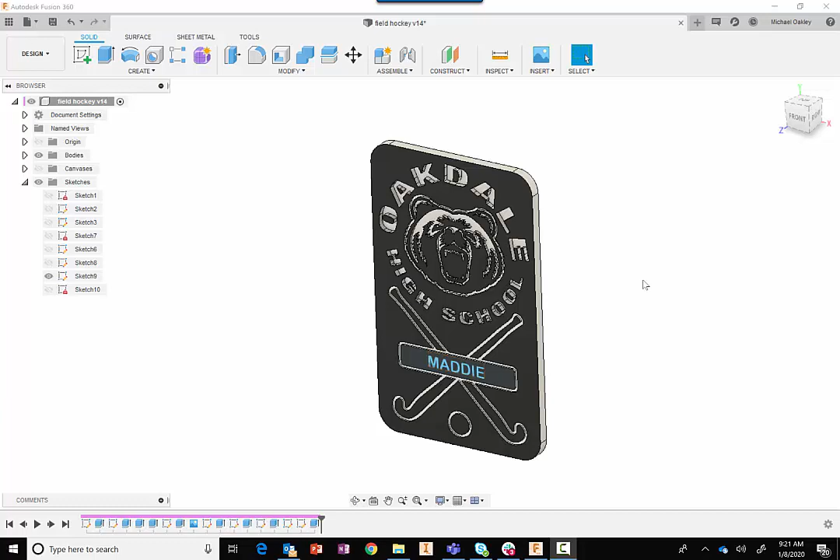Okay, so now let's take a look at the toolpaths we'll put on here for performing these V-carve functions. I'm going to switch to my manufacturing environment. Because I was messing around with the original design model, all these toolpaths are out of date, so I'm going to quickly generate them and have them recalculate the proper toolpath information.

A couple things I do here, especially with V-carving, because I see a lot of posts about, hey, my V-carve didn't go as deep as I wanted, or it went too deep. What I typically do is have a bunch of scrap around, and I'll program one of these letters and try to cut that on scrap just to test the depths I've defined, to make sure I don't invest my full sheet only to find out something is wrong. So utilize your scrap in meaningful ways so you can do test runs before you commit.

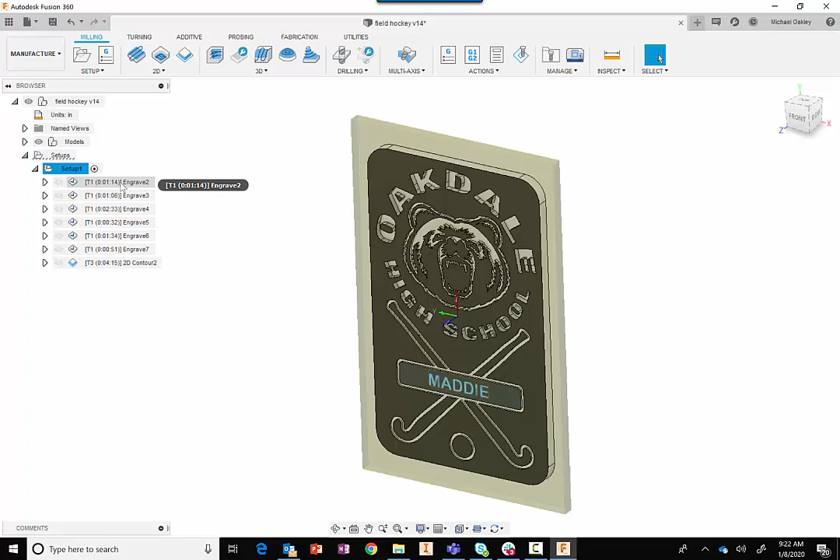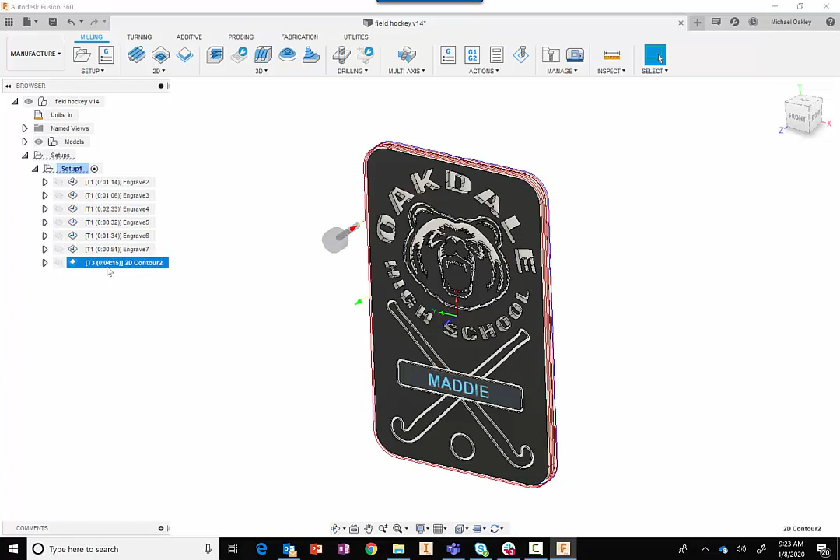Within Fusion, we can see all these different operations. I have an operation for cutting out the larger letters, the smaller letters, the face, some of the perimeters here, the actual field hockey logo, a circumference, and of course the final contour to cut that out.

Let's just examine these toolpaths and see what we have. I've been cutting these out of PVC, so what I've done is purchase white PVC, paint the surface black, and then perform my carving operation after that.

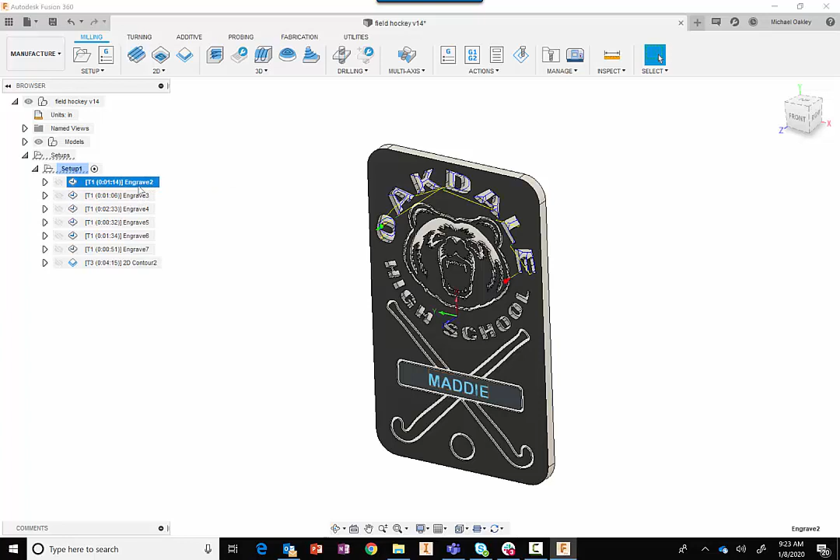Let's look at this very first one. The tool I've selected for this is a 1/2 inch 90-degree chamfer mill that I've defined inside of Fusion, and I use this tool for all the operations you see here except for the contour at the very end.

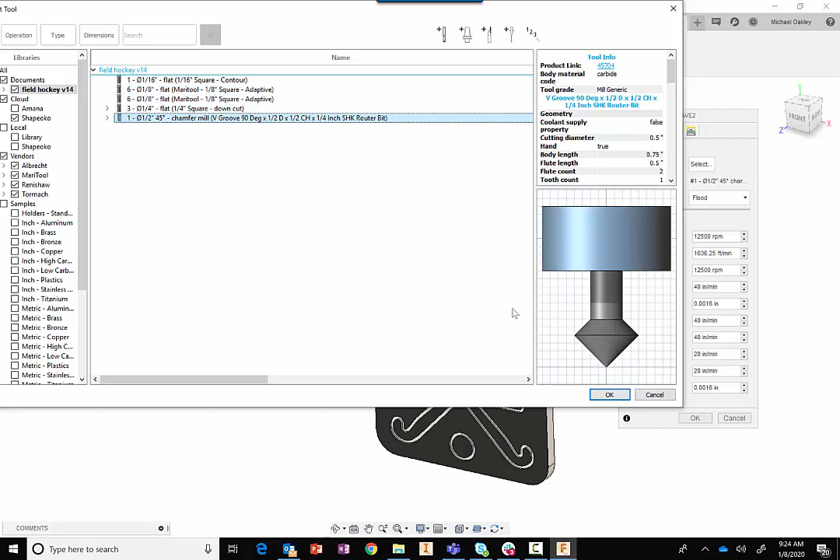Here are my spindle feeds, so my RPMs are pretty low. Cutting feed rate I set to be pretty slow, it can probably be a lot faster than that. What I saw was when I set it faster, I was getting some black rubbing occurring, so I'd run a second pass to clean that up a bit. But you can play with your feed rates. This entire model to cut from start to finish is only about 30 minutes, if that.

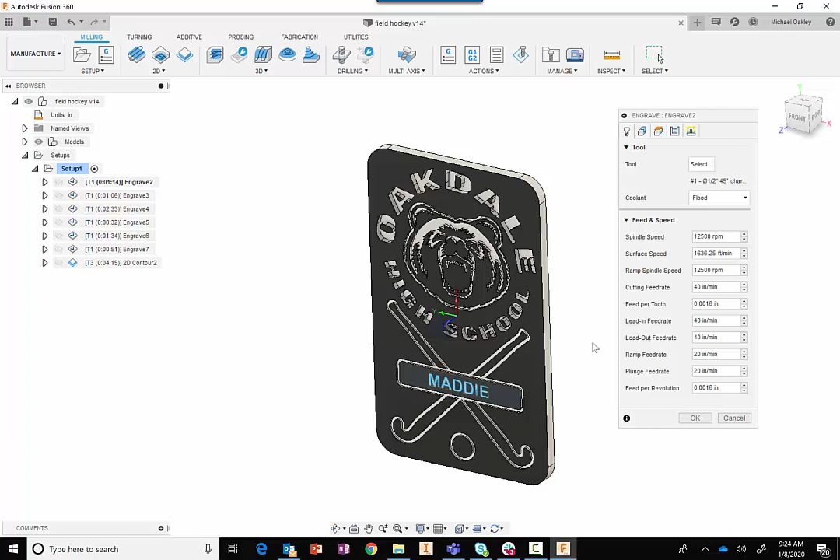Now here's the important part. Here's where I've selected the chains of what I want to cut, and I've selected the top surface of these features. Fusion automatically calculates the height that we have here. I went through each one of these and saw what it was going to do, you can see that's kind of an odd number that's put in there, so that's not something I put in to determine the height, Fusion automatically calculated that.

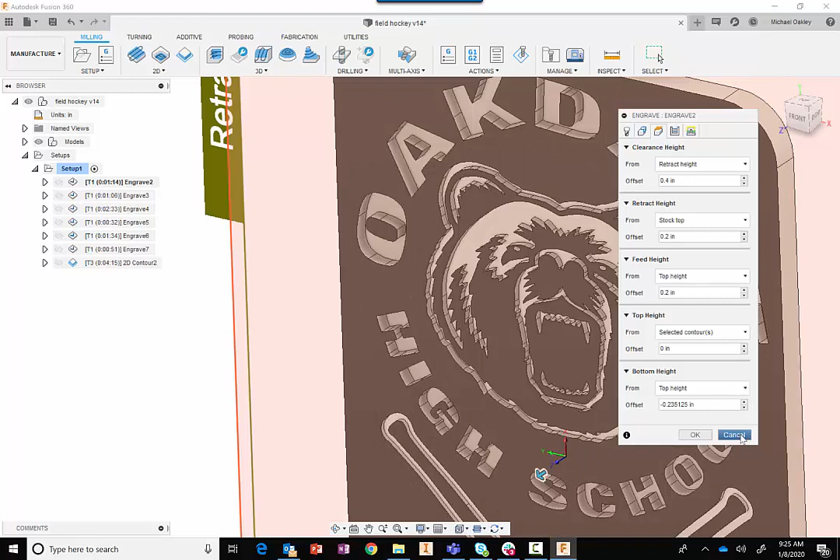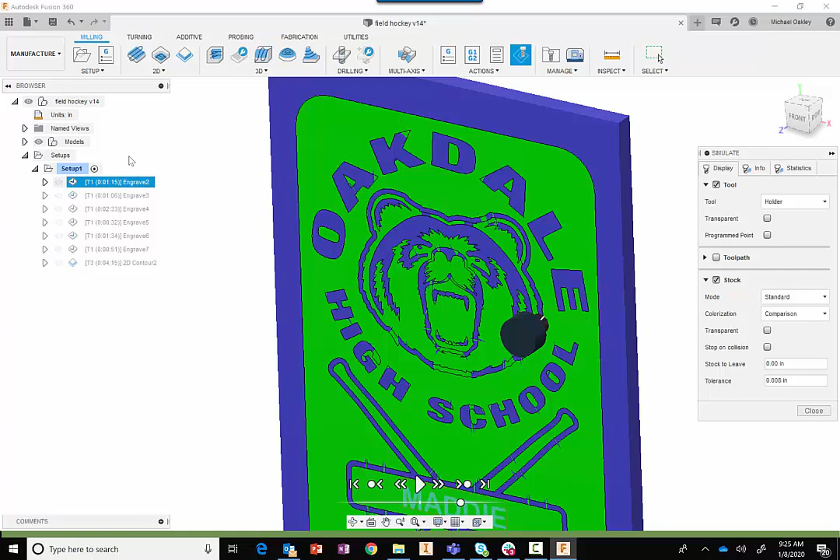Let's take a look and see what that might look like in a finished simulation. We'll generate that because we messed with the tool, and I'm just going to simulate that one toolpath. One of the things I like to do is turn the model off, especially with V-carve. Then I'll change this colorization to material, I'll make it this plastic vinyl, and go ahead and simulate that, and we'll see how it's going to look.

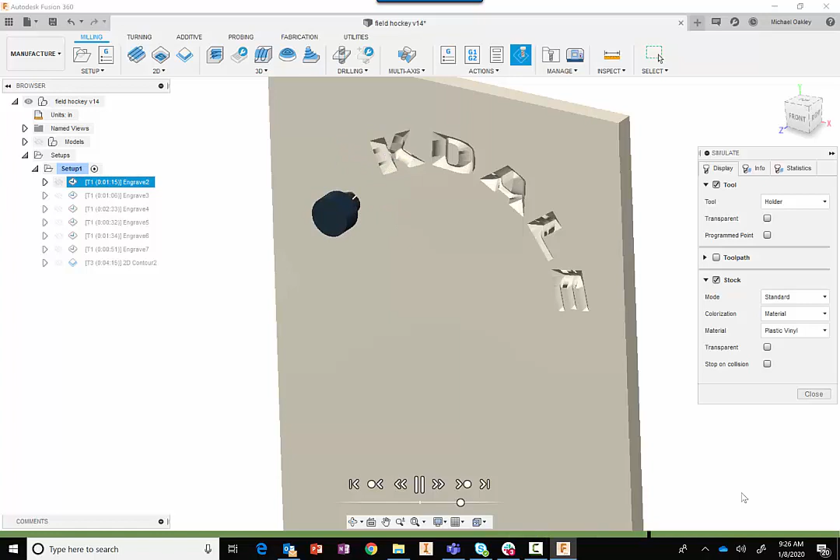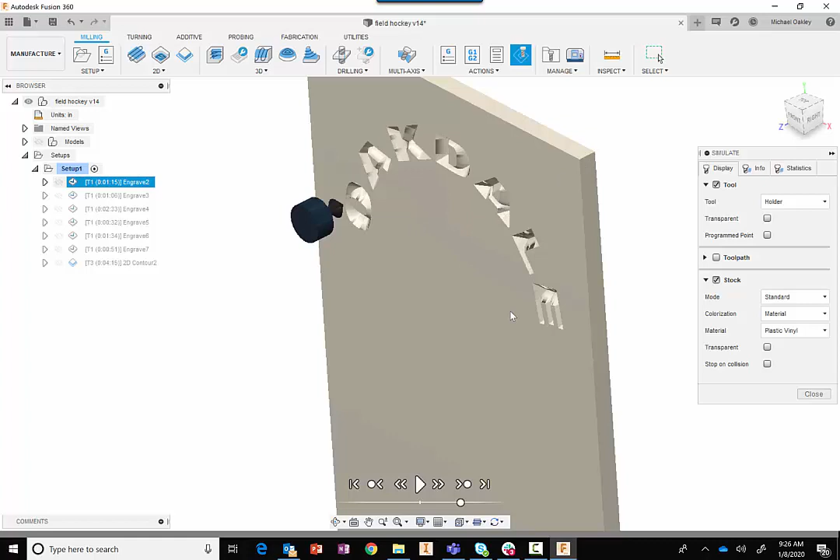That actually looks pretty good to me. I ran a test run of that, and I didn't end up losing all this detail in here, in terms of what Fusion's showing me versus what it actually outputs is pretty darn close. Of course, setting your proper Z height to the top of this board is what I use in this case. In the case of V-carve, I never set my height to the bottom, because there's varying thicknesses in the stock, and I think setting it to the top is where I've had my success.

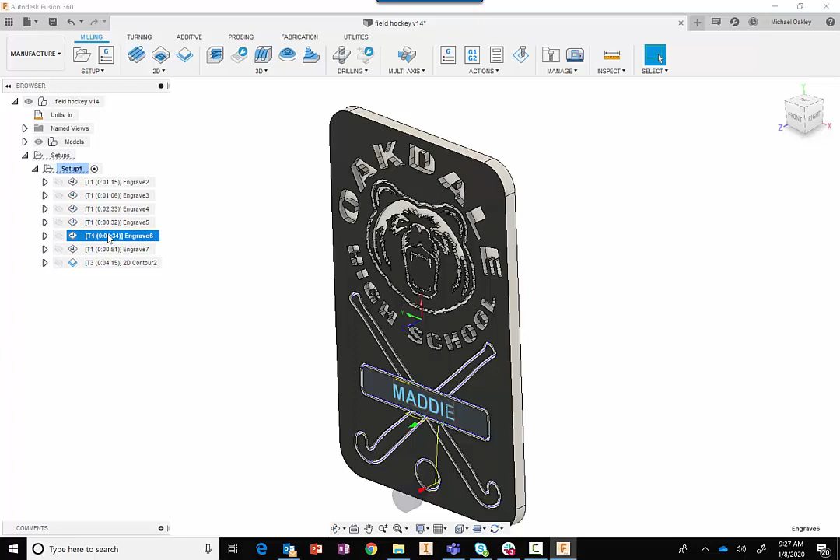Let's take a look at another toolpath as we go through here. As I mentioned, we used the same tool. This circumference, I could have easily used a small end mill to go in there, but I was able to achieve what I wanted with the V-carve 90-degree tool.

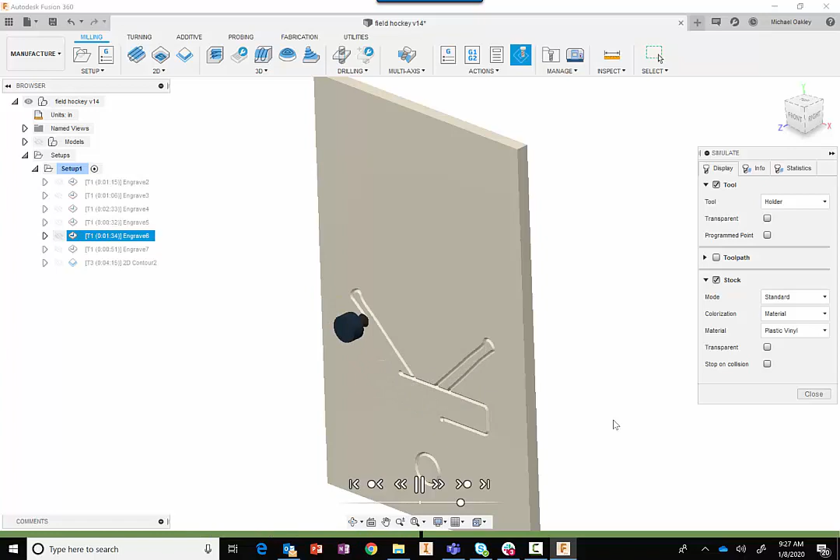And so now if we simulate this one, we can see this kind of stuff was acceptable to me, and it looked pretty good on the final output as well. And there, of course, is the tool path that Fusion created.

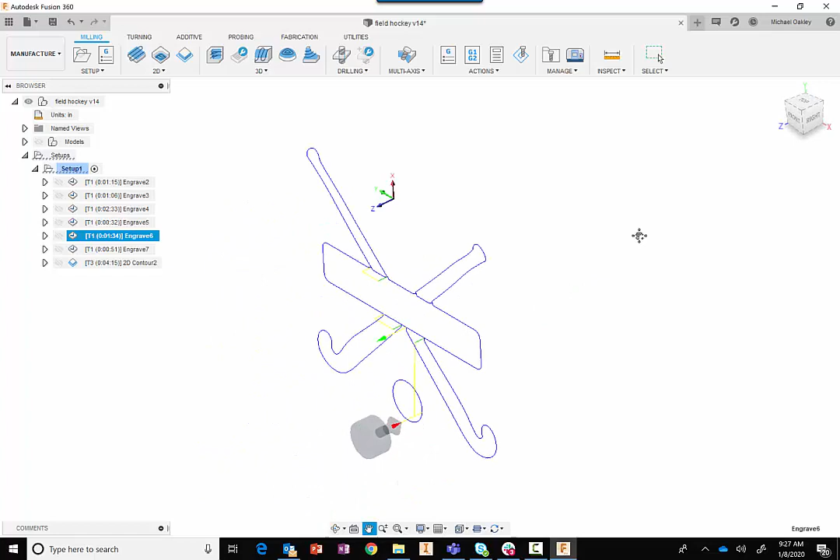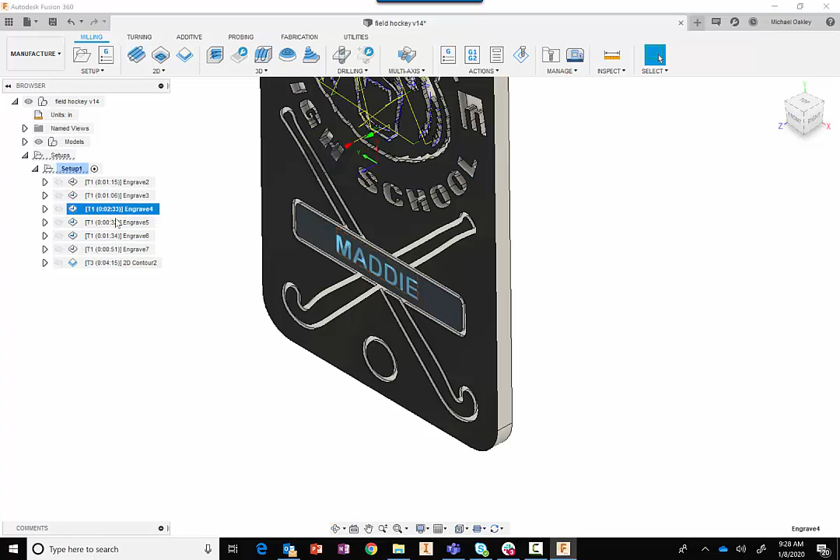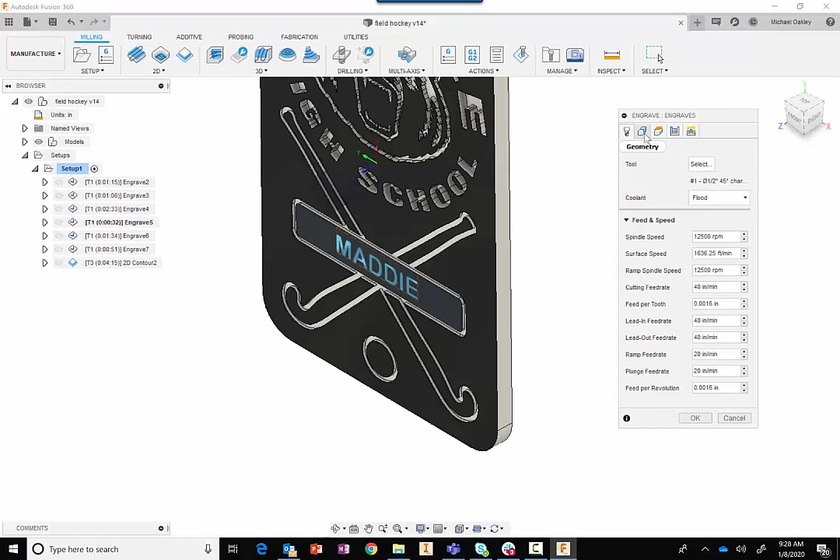So let's look at this piece of text that we have in here. Not quite sure which one it is here, I think it's... there we go. In this case, I think this one took a little bit of playing around with to get the depth correct, because the letters were so close. I'll show you what font I used on that, because I did play around with different fonts and had different levels of success with that.

Here in this case, I just chose the actual text itself, and then it put the tool paths around that automatically. As far as my heights go, you can see it did in fact calculate that automatically based off of the tool I chose to use for this.

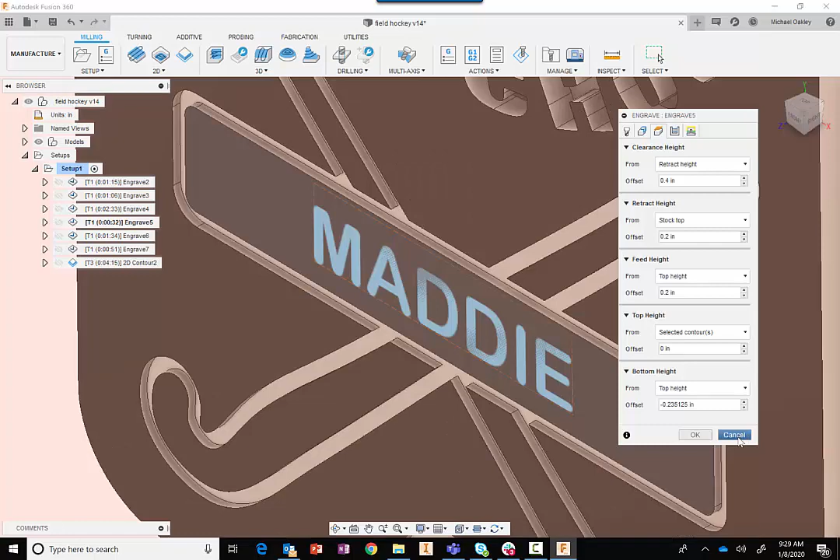And so if we simulate that one also, those are pretty much the final results that I got when I finished this model.

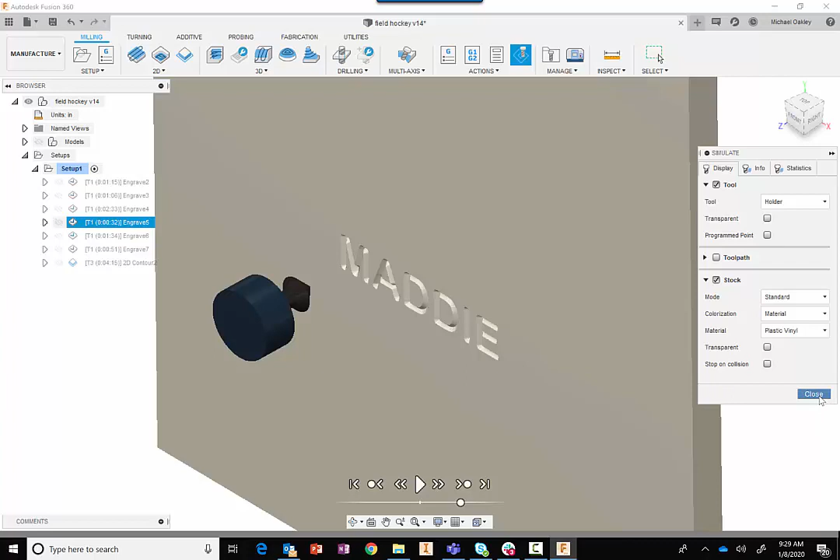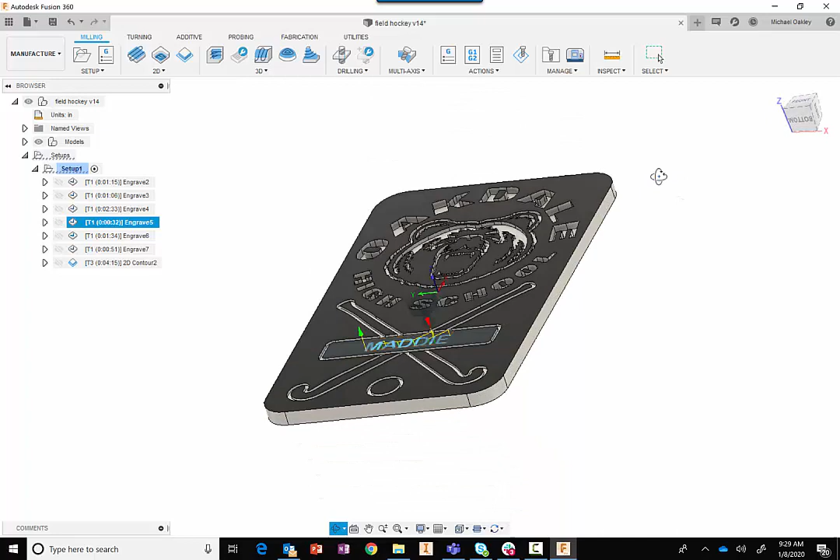Okay, so those were the particulars of this. I guess my biggest recommendation is to test some of these letters with scrap that you have. Make sure that you're going to get the desired results that you're looking for before you actually commit to your final design and your final cut.